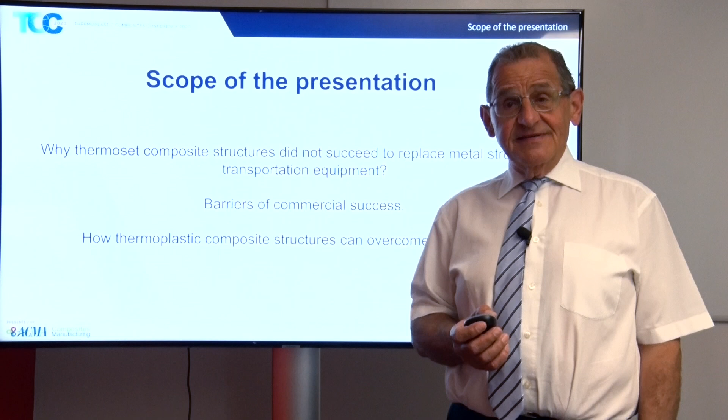My name is Jan Verhagen and I will tell you why, to my opinion and personal experience, thermoset composites did not succeed in transportation equipment. I will try to explain from my point of view the barriers of commercial success for this, and why I believe that with the new technologies and materials available in thermoplastic composites, this can be a success story.

So my basic assumptions are very clear. Avoid black metal composites, I'll come back to that later. Think in commodity products, and commodity transportation equipment means high serial production, because one-of-a-kind production in composite material makes no sense, it's too expensive. The solution requires always new materials and new production technology, and I experienced that over the last 30 years, that every 5 years you have to renew the complete ideas about the structures.

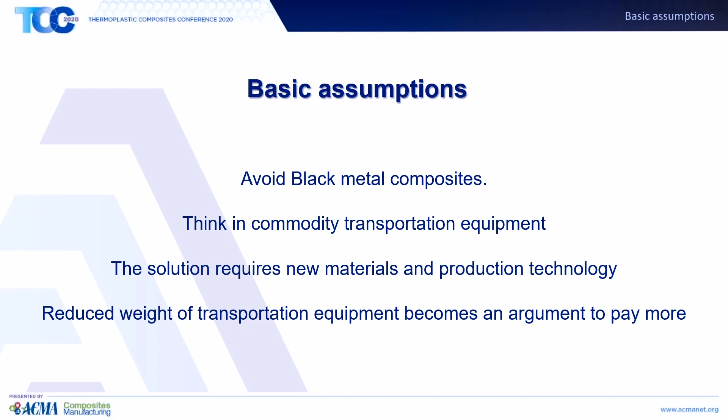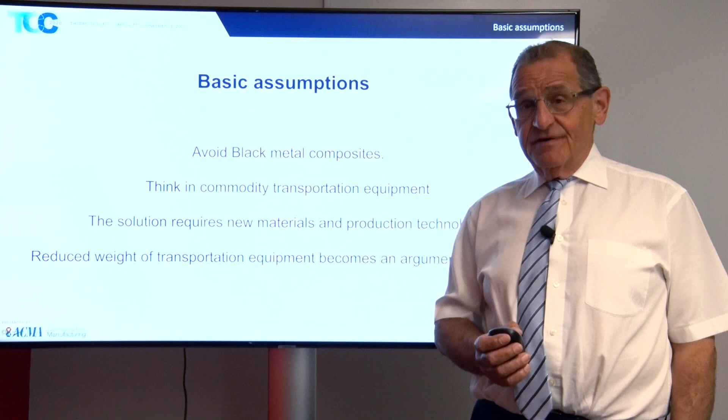Reduced weight of transportation equipment, up to now, to my experience, never led or was an argument to pay more for this equipment. Now, with the current pressure of carbon footprint reduction, this may be a new issue.

So think in fibers. Over 4,000 years, the wooden trailer was developed and became a marvel of technology. This is another subject to talk about, the Conestoga wagon.

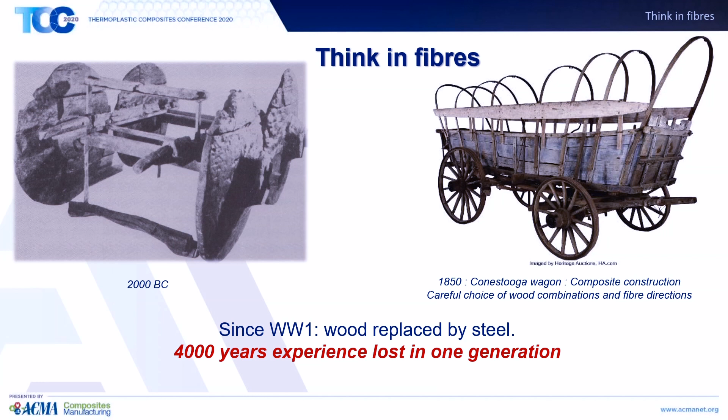But in World War I, so many wooden trailers were destroyed, and due to the need of trailers, the shift to metal trailers was made very quickly. And in the interbellum, this technology of wooden trailers, which is a composite trailer, was completely lost.

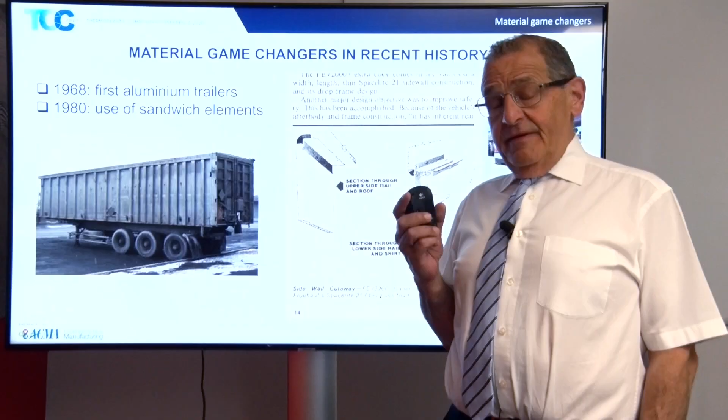The metal trailer still has its place for heavy transportation equipment and all these things. But as from '68, the first aluminium trailers were built by Benalu in France. And this was because the aluminium extrusion technology was available, giving a lot of design liberty.

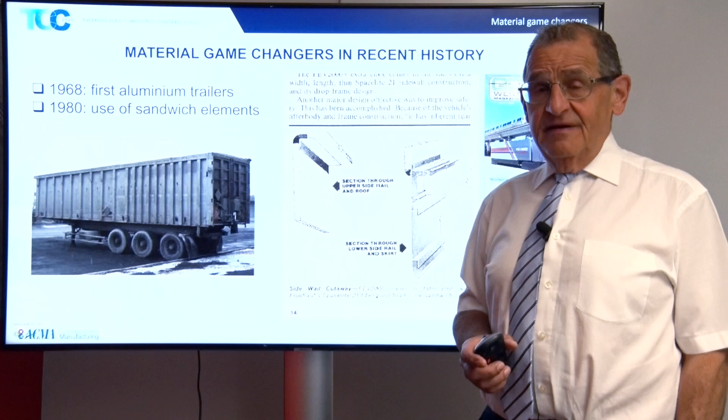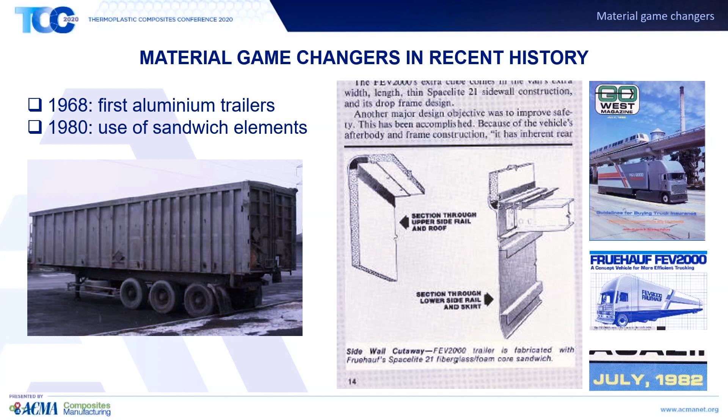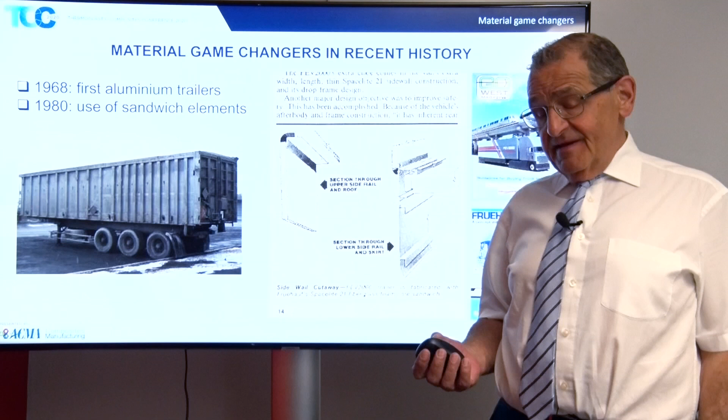In 1980, Fruehauf, and I found this article back, started with trailers where sandwich panels were used. Now, in the US, this is called a composite trailer because it's a composition of different materials. In my opinion, a composite trailer is something totally different. It is a combination of fibers and a matrix all over the structure.

So in the 90s, early 2000s, a lot of projects came up, and I call them failed examples - this is not a negative mentioning - but these were trailers built by universities and consortia, heavily subsidized by the European community, by national subvention programs. What they did is they made a working prototype, got a prize, an innovation award, and an applause. But since it was not designed for serial production, it stopped with one prototype.

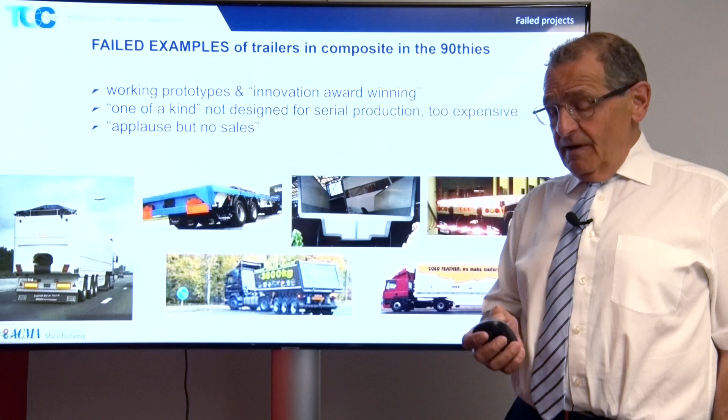So as you'll see, there's a lot of examples. One prototype, for example, this trailer, was in carbon fiber epoxy and cost 200,000 euro if they had to make a second one. So that is not sellable. I cannot imagine a transportation company who would pay that amount of money.

So on the demand of customers of mine who were looking for lighter material for transportation of bulk and, for example, wood transportation, we started looking for building a trailer that was possible to make afterwards in serial production.

So I bought the scrapyard of Bekaert Composites, the scrap of pultruded profiles - Bekaert Composites, who is now Exel in Belgium - and we glued all these profiles together to make the first trailer. And this was immediately a success, and the video of that trailer went around the world in '96.

So we built 2 more prototypes for transport of bulk, and they drove each of them 250,000 kilometers without any problems. And what was important, these trailers had everything in it to be built in serial production.

So I attracted interested investors for that, and we started Composite Trailer, and we built 40 trailers in serial production. And most of these trailers were ordered before even the production started. So this was a real commercial success in the beginning.

I will tell you later on that this was in the curve of the innovation, the early believers. We built them in Europe, and we had a license agreement with Martin Marietta in North Carolina, who also built the American version that you see here in the US.

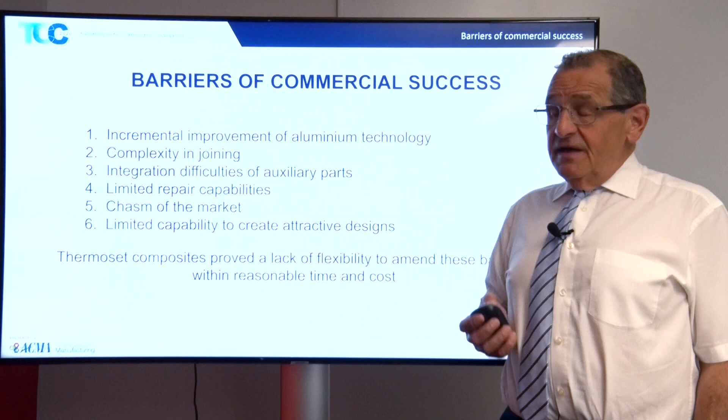So we encountered a lot of barriers to commercial success. I'll go quickly over this because I will explain them in detail afterwards. We had an incremental reaction from the aluminum industry. The glue connection, the joining connection in serial production, was always a problem. It is extremely difficult to integrate auxiliary parts that are commonly used in the market. The repair capabilities are very limited.

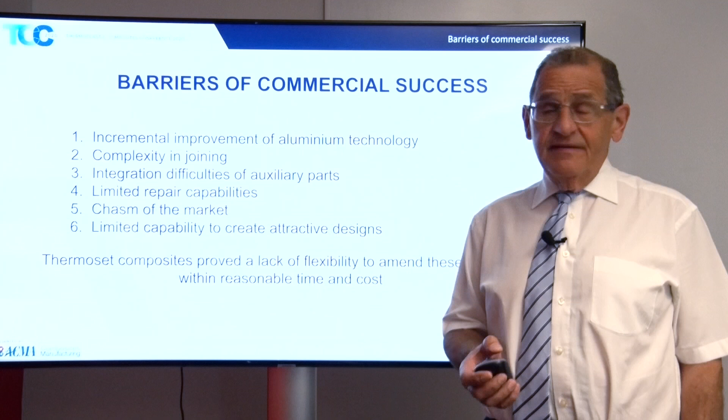We have the chasm of the market - I go very deep into that - and we have a limited capability to create an attractive design, a sexy trailer. So thermoset composite proved a lack of flexibility, and that was our biggest problem. And so immediately when we started, we got a very strong reaction from the aluminum market.

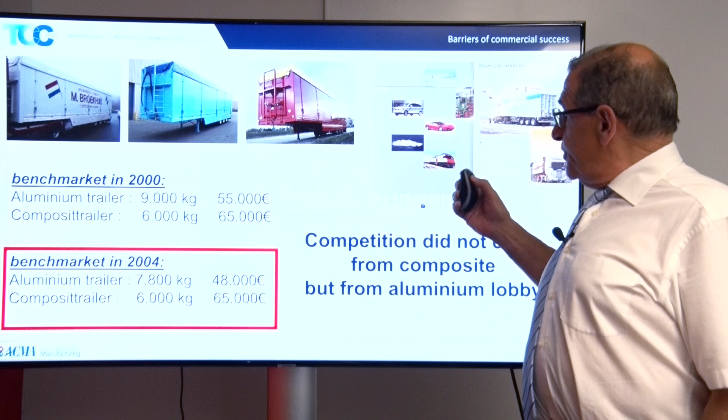Nearly on every show I presented my trailer, they had a booth of aluminum, showing that aluminum could be much better engineered for trailers than they did at that time. They even published a book

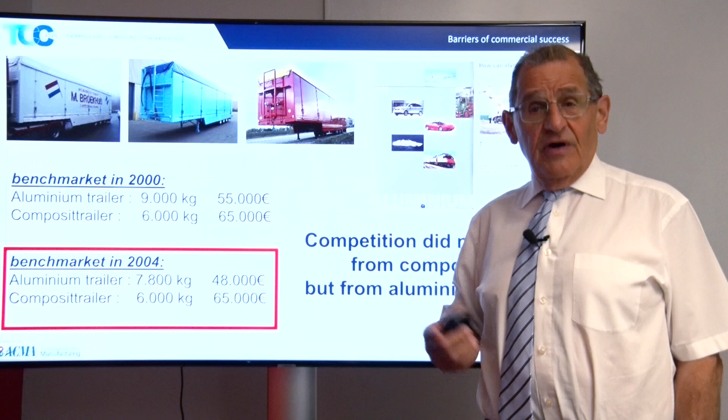distributed to all the trailer builders about how to better engineer a trailer. So if you compare the benchmark in 2000 and the benchmark in 2004, 2005, you can see that the aluminum industry changed enormously their structures, improving, reducing weight, reducing the cost, and I was not able to answer with composite trailer for that because I had my serial production in start, and with thermoset composites there was no reaction possibility, even if we saw some improvements to make.

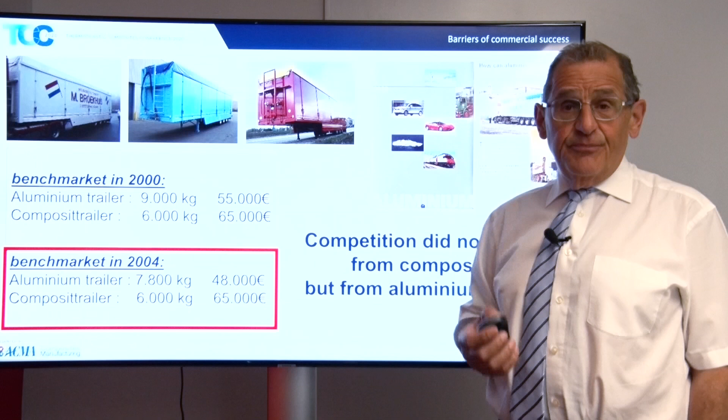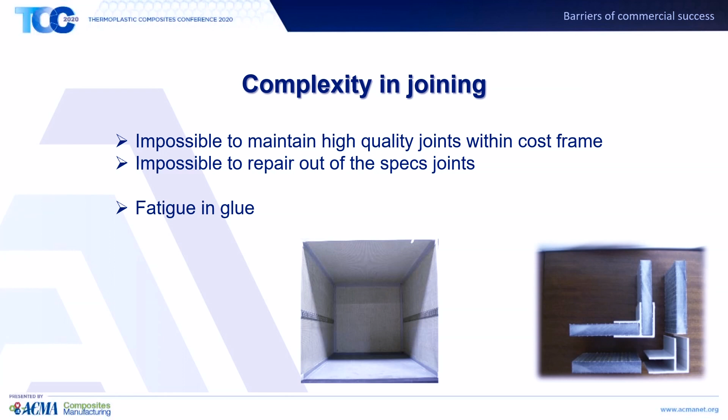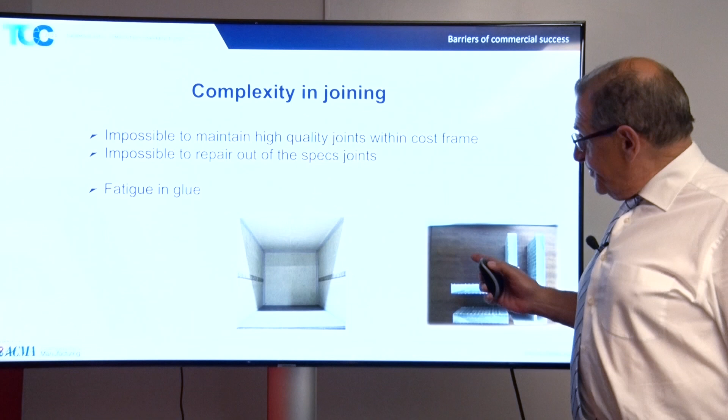The complexity in joining - what we discovered is that you practically need a quality controller next to every gluer, because for example in this connection of a floor and a sidewall, if you have the connection profile, which is a pultruded profile, that is not cleaned enough in this area, well, under the pressure of the bulk it will break, and the repair capability of such a thing is enormously difficult.

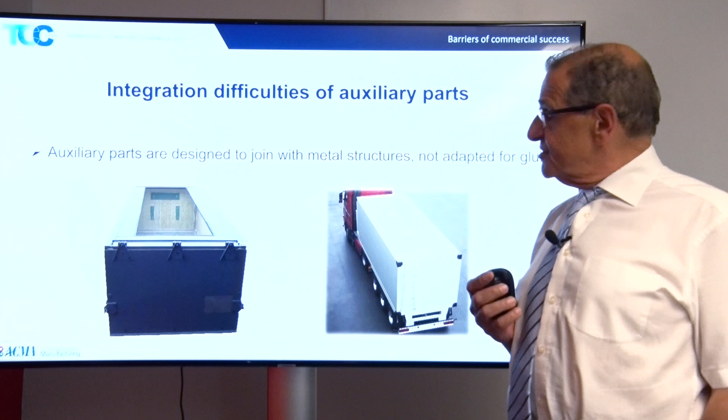The auxiliary parts that are available, for example hatches, are made to be welded on a steel or aluminum structure, not to be glued on a composite structure. So you have to find new ways to connect them, and that is costly and adding weight.

So if we sold a trailer here in Lokeren, Belgium, which is the middle of Belgium, but the transport company went to Austria, which is 1,500 kilometers away, and got an accident due to rough handling of a forklift or something like that, there was no possibility to go over there and repair. So the transport company drove back 1,500 kilometers loaded, mostly damaging the structure more than we would have wanted. So you need very specialized repair shops.

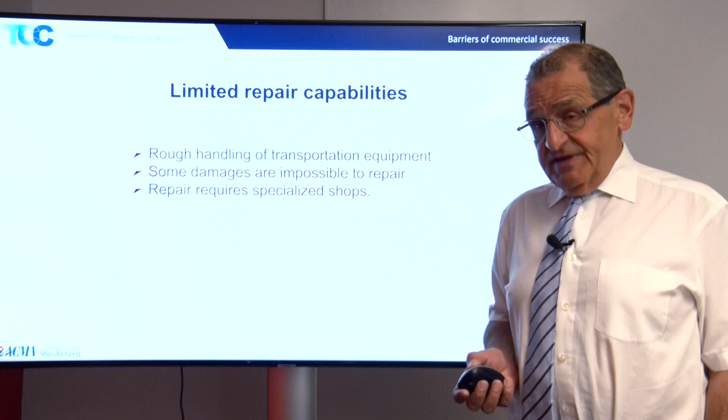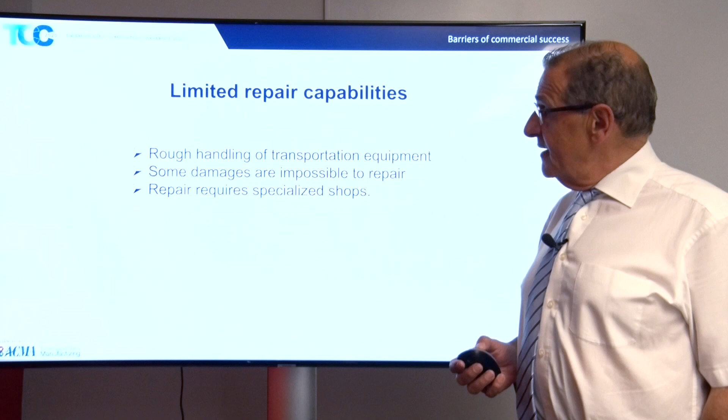So the new concepts should take that in mind, that the impact capabilities of the material should be much, much higher than what we lived through with thermoset composites.

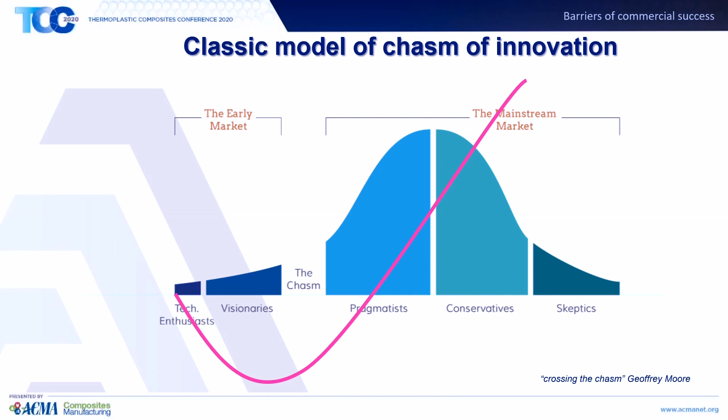So the classic model of the chasm of innovation is known. It was first published by Geoffrey Moore in 1991. And when we made our business plan, we took this into account. This is the profit and loss curve. We took this into account. We knew there was going to be a chasm - that the pragmatists are looking very carefully to the visionaries and early believers and enthusiastic people. How will the trailer behave after 1 million kilometers?

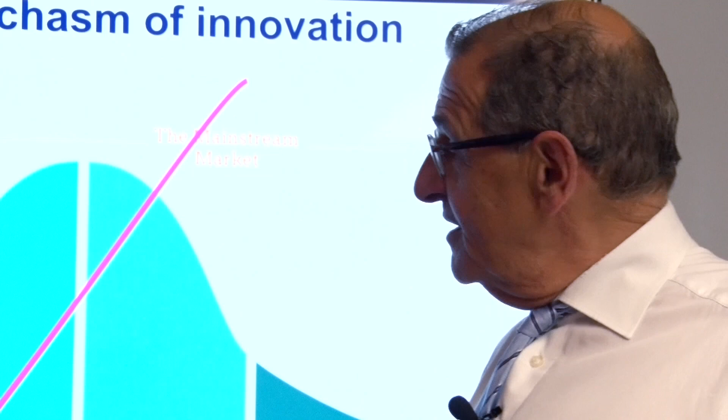But for the changing material of the trailers, this was another problem. So if you look to the chasm, with our project, this gap was enormously big.

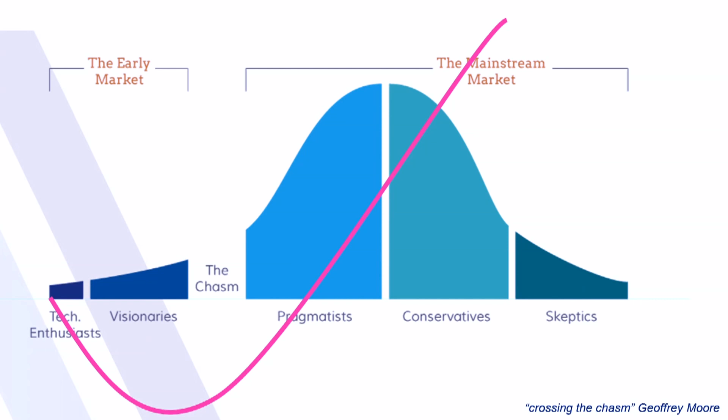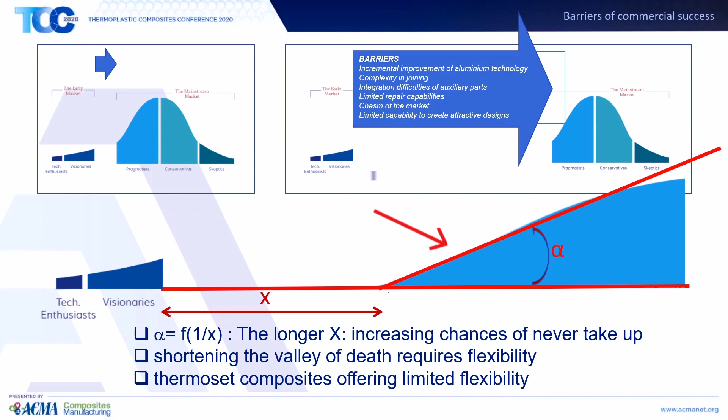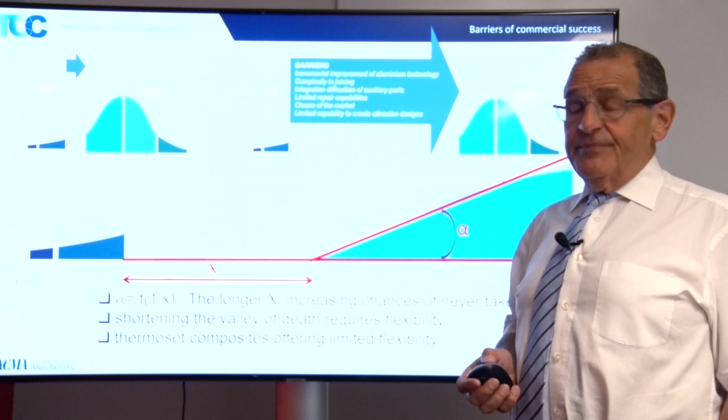So the barriers that we encountered are mentioned here again, and this is a very long period. The longer this period takes, the less sharp the curve will be for going up in the pragmatists. If it is long enough, you will never take it up, and that's what we lived through. The reason was we couldn't react to all these barriers because of thermoset composites - it was too expensive to do, and I will show you later how this was.

So let me give you two icon quotes. Brandt Goldsworthy, who is called the father of composites and pultrusion, after I gave my presentation on the ICE in 2002, we had a meeting and he said, 'My friend, your project is wonderful, but it will only be successful once you use thermoplastic composites.' So I was very excited, called home, said I have a new technology, but in the evening Clem called me, who worked then for Goldsworthy, and he said, 'Jan, slow down, 2 feet on the ground, this technology is far from being ready,' and he was right.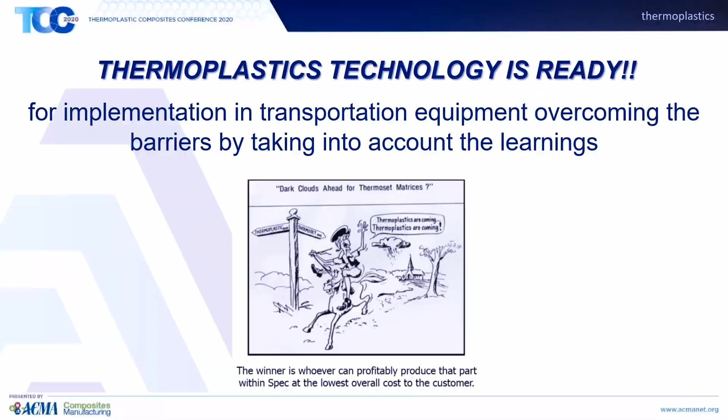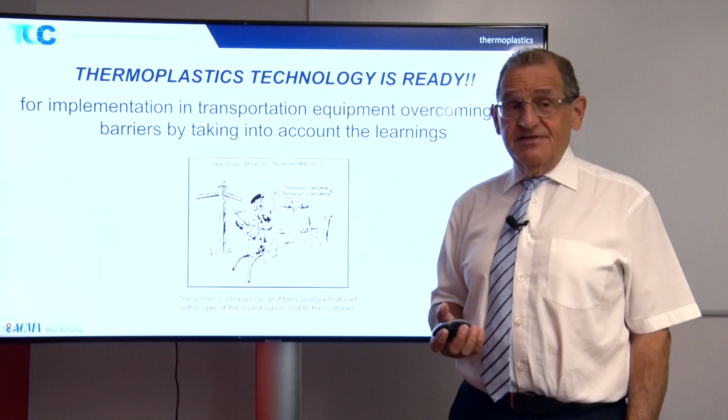So when I heard the presentation of Robert Bryant from NASA on the CFK Valley Convention at Airbus in Stade, I thought that the technology they are going to use was perfectly applicable with other materials, but with the same technology on the ground in transportation equipment. So I was very happy to meet that man.

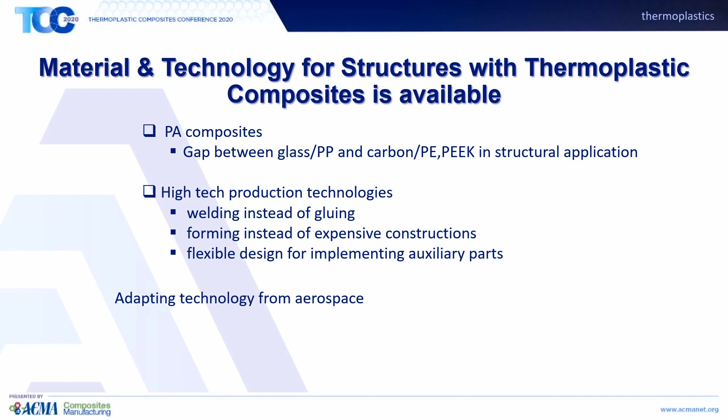What we did is we selected materials and technology available. So we went to polyamide 6 organosheets where all materials will be built, and we tried to use technology available in aerospace in other environments. So we will adapt it.

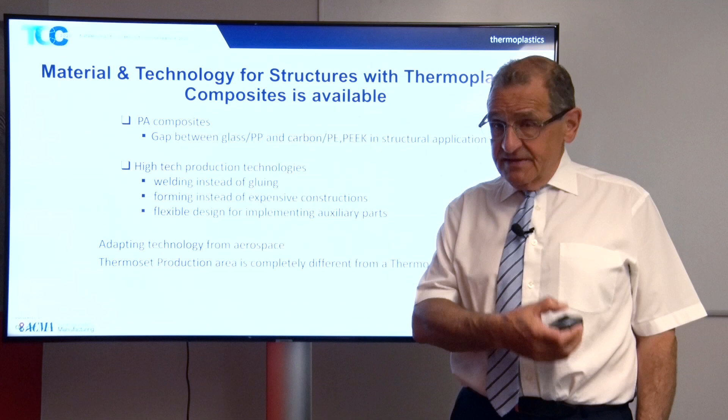So if you think of a workshop, a thermoset workshop, where for example the wings of a wind turbine are made, or a boat, or bridges, it's completely different from a thermoplastic environment. A thermoplastic environment - think of a metal shop and change the material to a thermoplastic shop. It's more in that direction that we have to think.

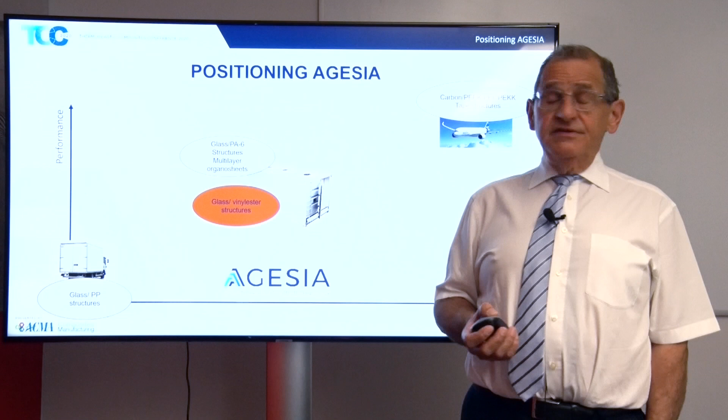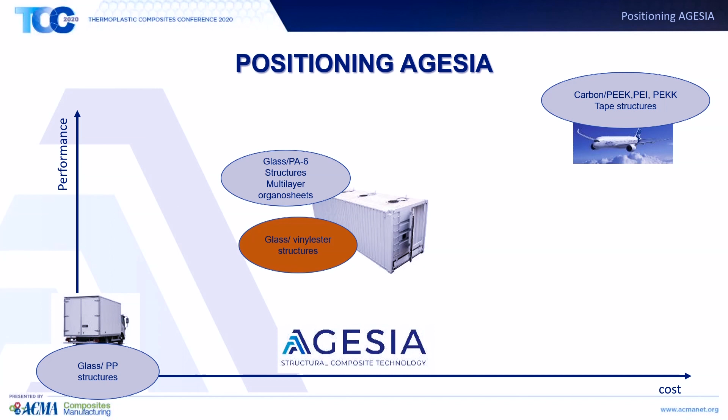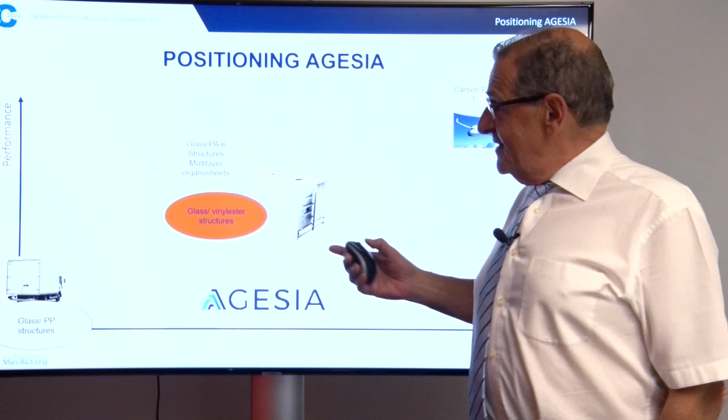So when we position AGESIA, when I take the 0 point, the glass polypropylene environment, and then everything that is aerospace - don't look to the scale because I couldn't put that high enough, it would disappear from the screen. With my former technology, we were a glass vinyl ester construction, and we think with PA6 that we can improve the performance at the same cost. But then we got in contact with Johns Manville for the new product, and what we see is that we even can raise the performance and lower the cost by using this kind of organosheet.

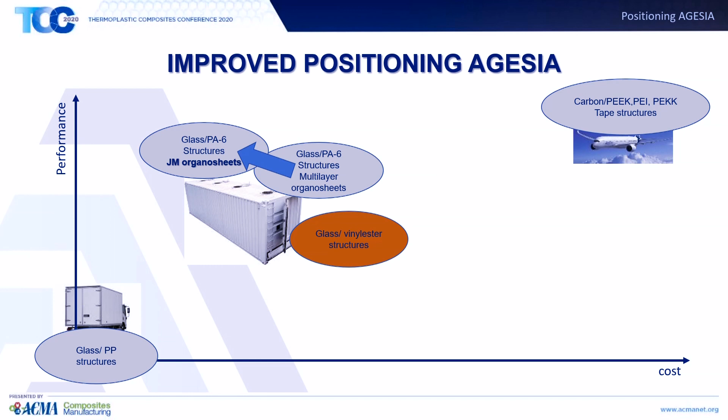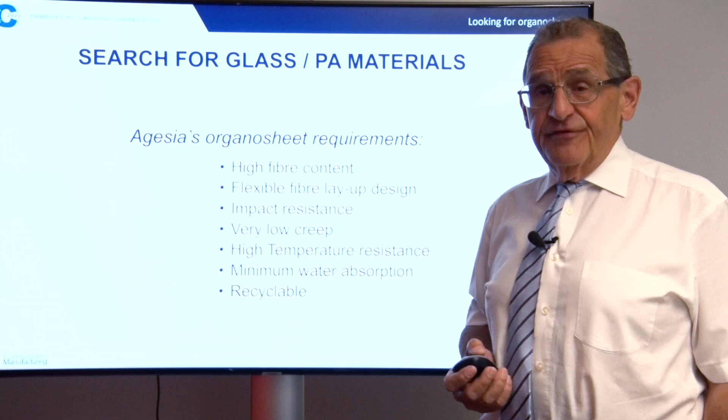Let me explain a little bit further. When we thought of using polyamide 6, there was a lot of people having objections against using that in transportation equipment, and we made a specification for this organosheet, and guess what?

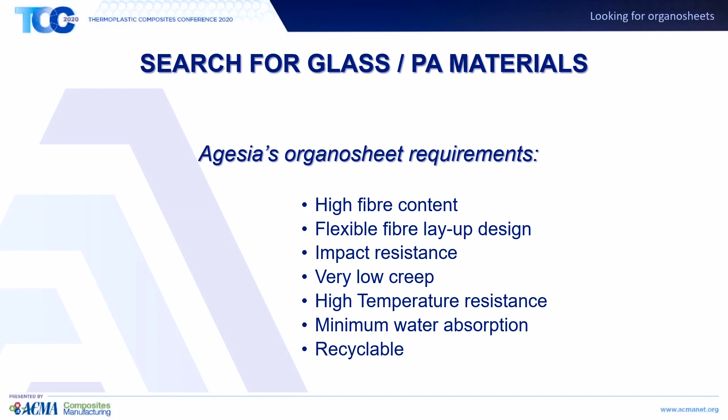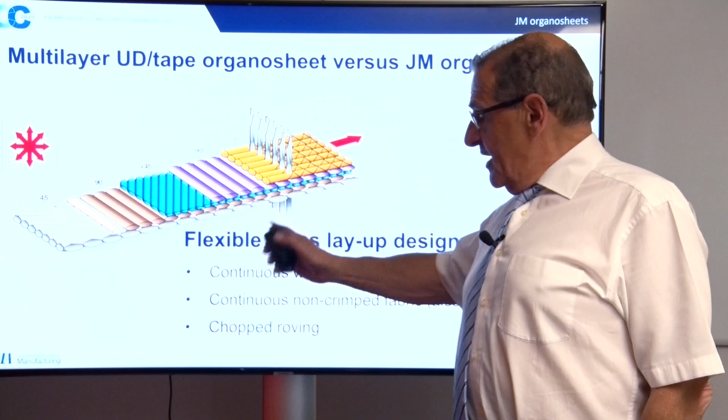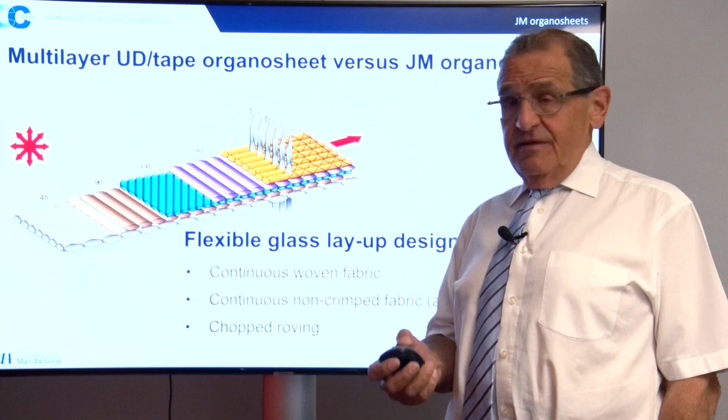The organosheet of Johns Manville answers completely to our requirements. Everybody knows organosheets are made out of multiple layers of unidirectional material. Johns Manville starts with a layup glass with a special sizing of their glass, meaning the engineer has much more liberty in using different kinds of layups. So we can use continuous woven fabric, non-crimp, and chopped roving, and also define the fiber directions already in the weaving, for example.

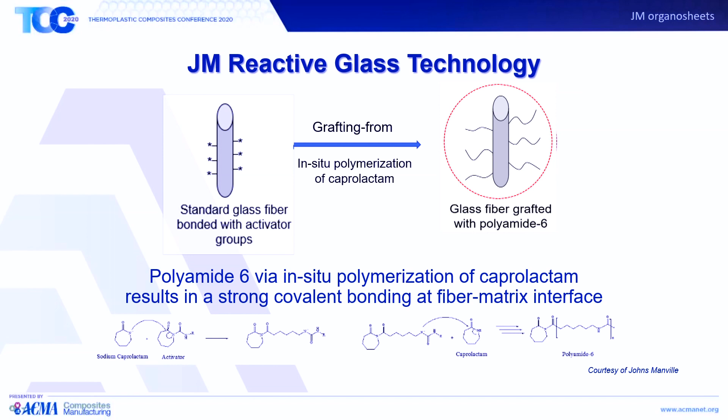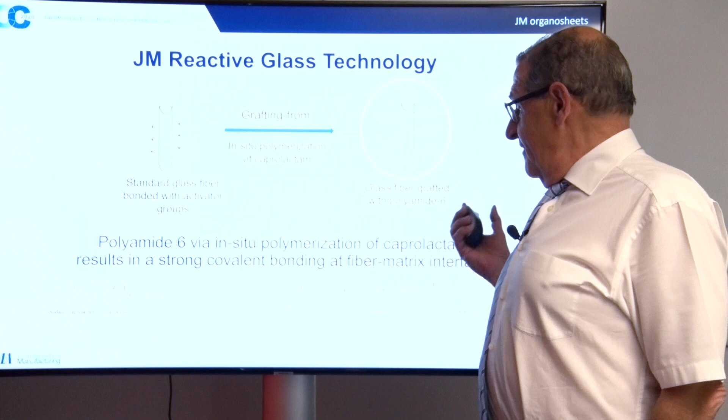Let me explain a little bit about the JM organosheet that we use, and we believe in it. A standard glass fiber is bonded with an activator group. Johns Manville changed the grafting form, and it's grafted with polyamide 6. So if you do the in situ polymerization of caprolactam with the fibers, you have as a result a very high covalent bonding between the matrix and the fibers.

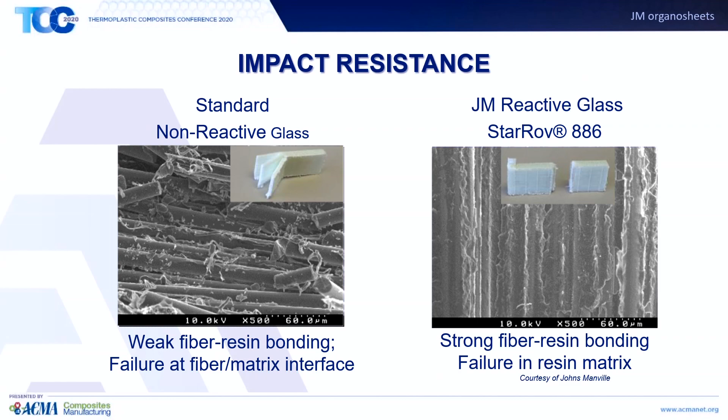Remember that I talked to you about impact resistance that we need. If you have the non-reactive glass with an impact, and the same impact of a reactive glass, you can see that here you have a failure at the fiber matrix, and here you have a failure in the matrix, which is much, much better. We did a lot of tests with impact, and they are very, very good.

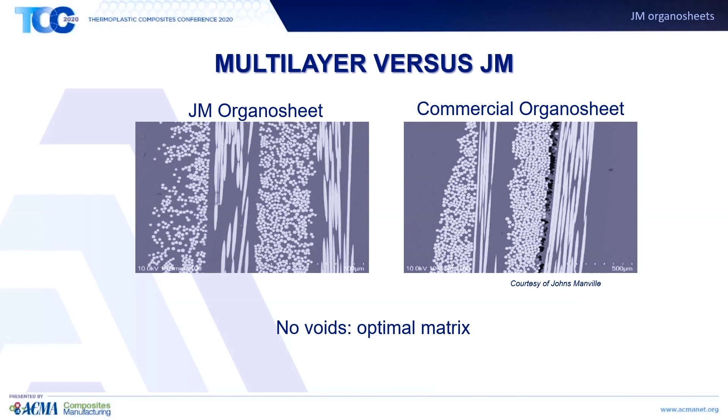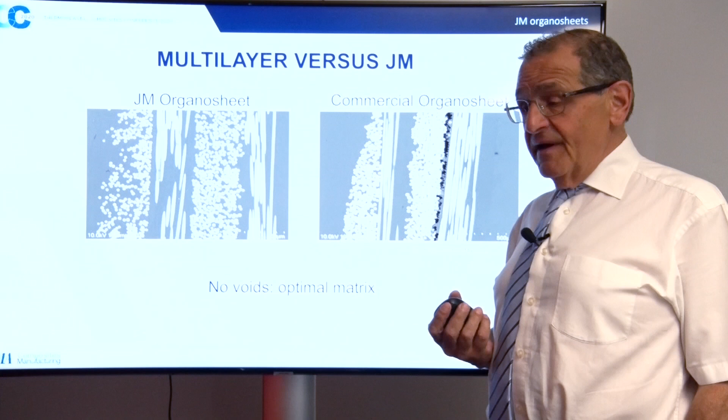The multi-layer organosheet that you can see here always has a problem of voids, which you do not have if you use a complete fiber structure and then insert the caprolactam. You don't have these voids, which is also a big improvement.

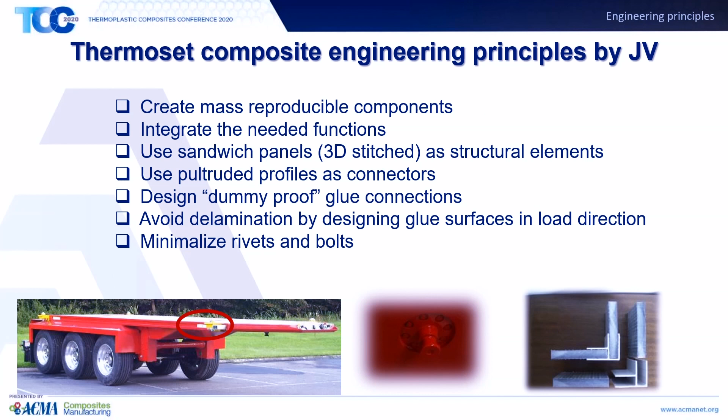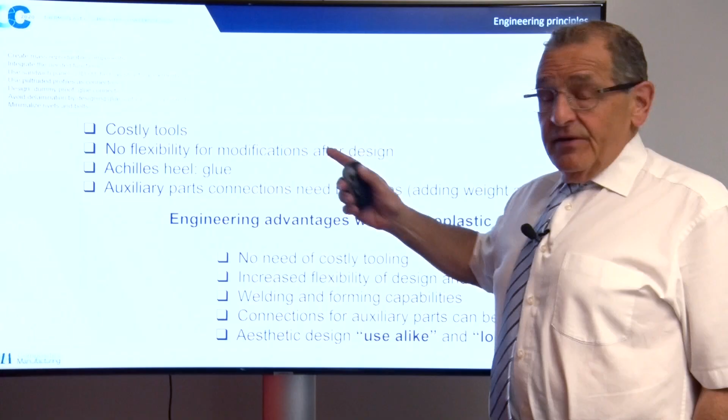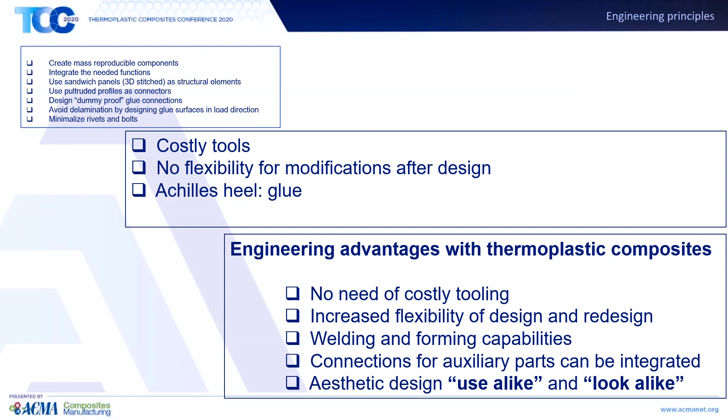So I just show you the composite engineering principles that I developed over these 30 years. I will not go into detail over it, but what is important is that it always led to very costly tools, no flexibility after design, so redesigning with thermoset composites is not so easy. The Achilles heel is glue, always a problem, and in aerospace they overcome it with millions of rivets, which we didn't do in our trailers because of the cost. And auxiliary parts connections need interfaces, so this is something we could never overcome with the better engineering.

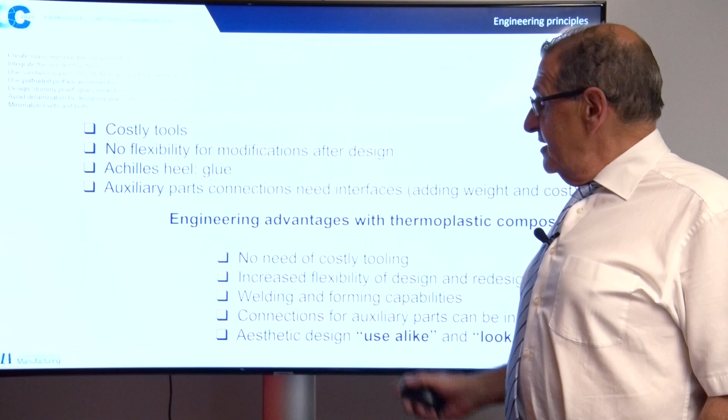If we do the same engineering with thermoplastic composites, we do not need the costly tooling. We have increased flexibility of design and redesign, which is incredibly important. Welding and forming, connections for auxiliary systems, and what is very important, aesthetic design. Not only build something that is use-alike, but also look-alike, and if possible, look better.

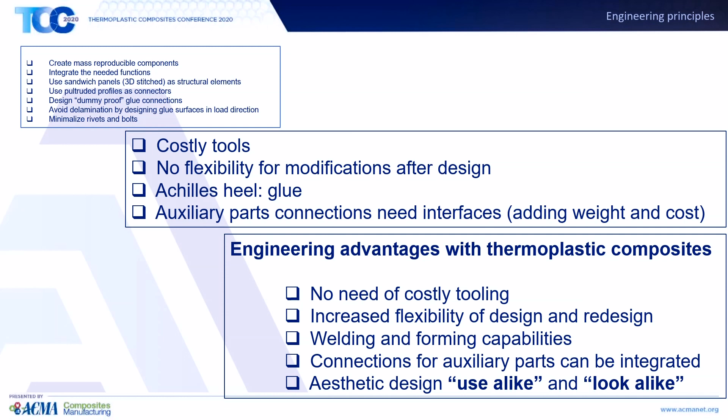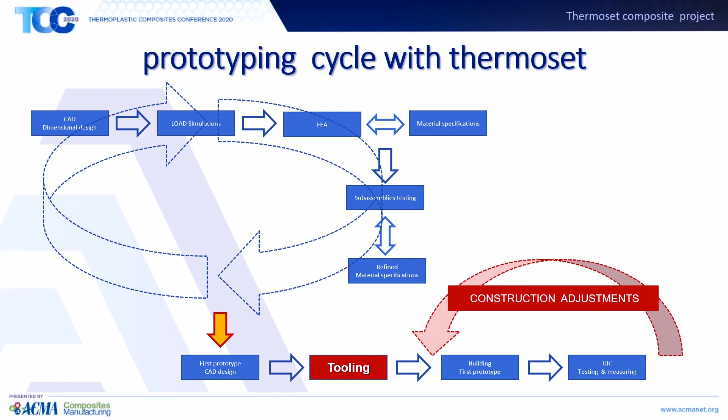Everybody in engineering prototypes knows these circles of prototyping. From CAD design to material, refined material and part tests, you come to the building of the first prototype, with in mind that this first prototype is also a first of series. In case of success, you do your production. You have the tooling, which I put in red because it's a barrier, you cannot go back. Then afterwards, suppose you made, like we did, 40 trailers on the road, and you need adjustments on your design, you can only go back here.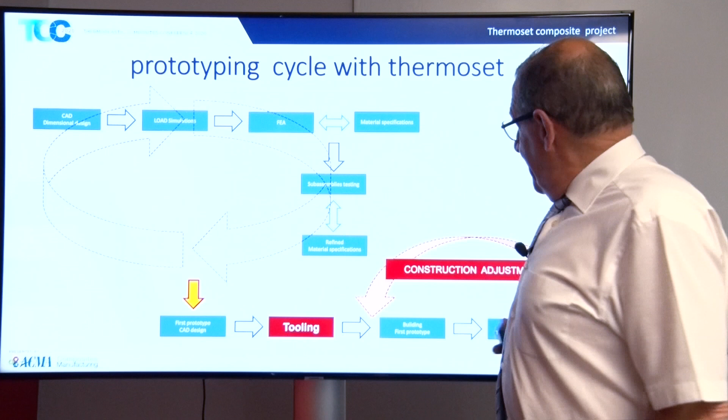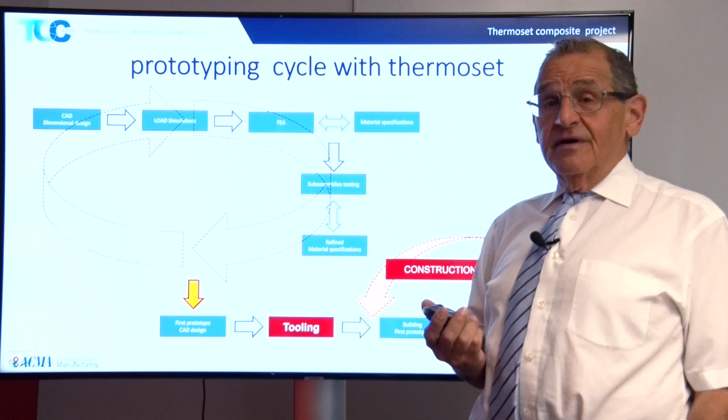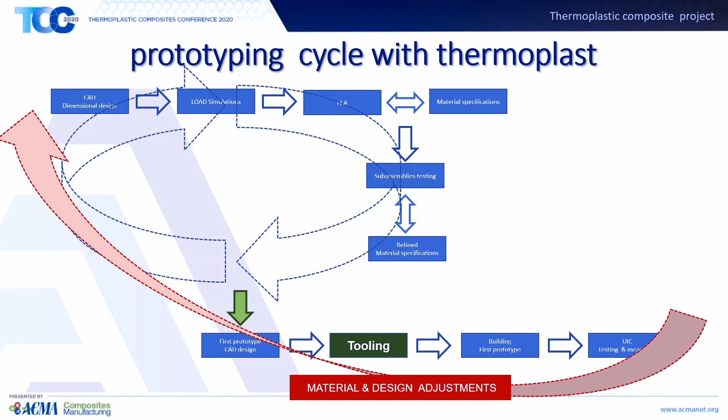Otherwise, if you do this circle again, it's enormously costly, because of your tooling, for example pultrusion equipment, is enormously costly. So if you go to the prototyping cycle with thermoplastic material, this means that after first series, you can go back up here, do the whole circle, make your adjustments in your tooling, and build a better prototype or a better series material.

So the company we started up early this year is called Agesia, and the final mission is that we will reduce the carbon footprint in total. I'm also Vice President of the European Composites Industry Association, EuCIA. We work very hard in the frame of recycling thermoset composites. We have the EcoTool, which works perfectly.

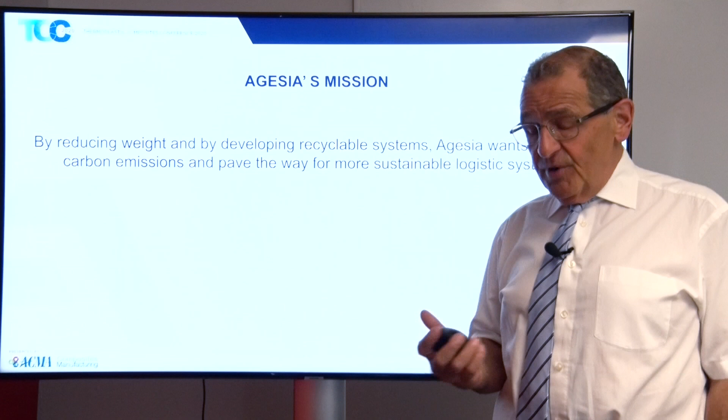But what I'm doing here with thermoplastic material is going up front, using other materials that are better recyclable, and it will never replace, for the moment, the thermoset in big series for wind turbines and boats and all this stuff. But in the place that we are doing, you can easily scrap the thermoplastic material and use it in a second level component.

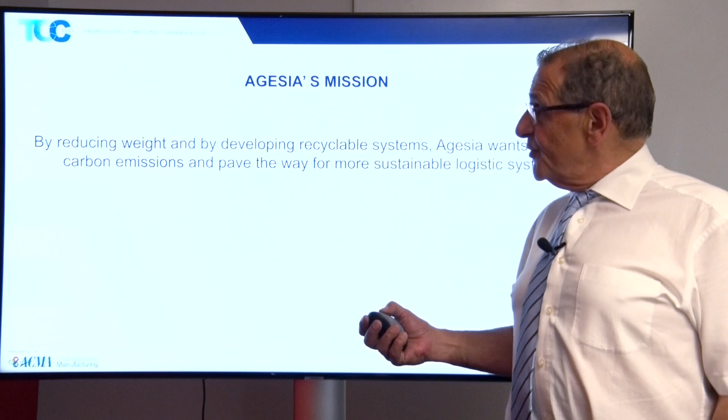So we value long-term relationships where we will work together with companies that are interested in building prototype up to serial production equipment. We strongly believe in co-creation where the end user or the end producer of the material is very narrowly involved in the design and development of the products.

So we develop our structural components based on panels and on beams. I can tell you that regarding the panels, we have developed a very strong thermoplastic sandwich panel.

So, food for thought. We believe that doing what we do will facilitate the acceptance of thermoplastic composites and new technologies in aerospace, because we are not tied up with the TRLs that are absolutely necessary in aerospace, but that we can skip in transportation equipment. And I thank you for your attention.